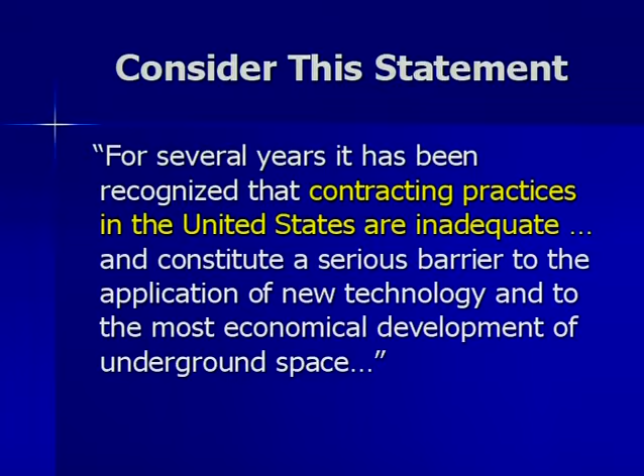But on the civil works side, tunnel contracting practices have gone through quite an evolution. Consider this statement, if you just bear with me while I read the key words. It says, for several years, it's recognized that the contracting practices in the United States are inadequate. Whatever we're doing now in terms of how we procure services, how agencies and states do it, it's not any good. So when was that?

I won't ask any of the students because it was way before most of you were born. It certainly was not today, wasn't last year, it was in 1974. So it's 30 years since that statement was made. It seems maybe benign in perspective of many controversial things going on today, but there was a crisis in the mid-70s.

Not just a fuel crisis, not just an oil crisis. To say that the contracting practices in the United States were inadequate was a comment that occurred because there were major construction projects. The Washington D.C. Metro had a lot of problems, delays, uncontrolled costs. I can even talk about the Central Artery. I think there were even bigger, more real problems at that time than people might allege about some of the big public works projects today.

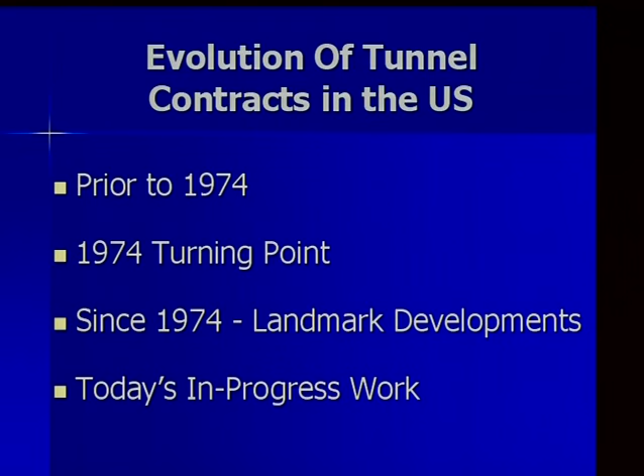Fundamentally, from the business side, whether you're a tunnel contractor or engineer, this was bad for business. If you had contracts, nobody could make any money, nobody was happy. Something had to change. So 30 years ago, there was a history of the way things were done from 1974 to a turning point. Then I'm going to talk about some developments that will come into things you do in geotechnical engineering, things you might work on in reports in the coming weeks, months, and years of your career. How what you do will fit in and have a role in future contracts.

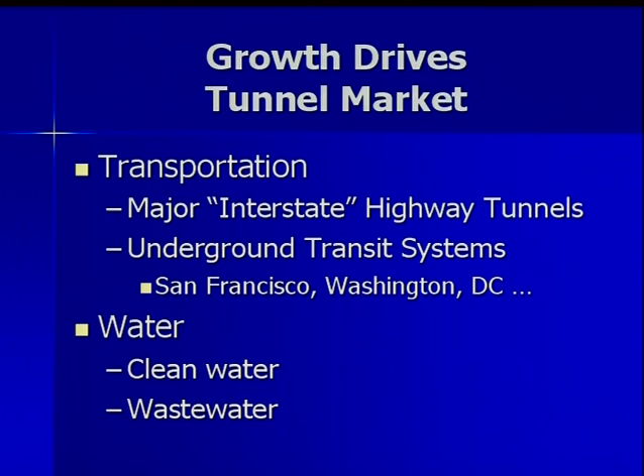Prior to 1974, and there's a reason for that date, what was driving the market? At that time, major interstate highways were still actively under construction. San Francisco was just finishing a transit system. Washington D.C. had started a decades-long process. There were clean water programs, wastewater tunnels. There was a lot of work going on. I show here the Washington Metro, and things in San Francisco, clean water. All over the world, there were these major projects.

But what was happening? The Eisenhower Tunnel - who has gone skiing in Colorado, driven out there? Have you driven through that tunnel up through the mountains? Anybody remember going over Loveland Pass? Scare you to death, you know? Well, those tunnels were hard fought. The first one, there's a whole story - that tunnel, the right one when you're going west, changed the paradigm of what it took to build these big projects. A lot happened because that job came to a dead halt, hitting a huge fault zone in the middle of the mountain. Water Tunnel number 3 in New York was also legendary and also a problem.

Clearly, there was something new needed, innovation, new ideas, better ways. We were really living in the 70s on the practices that had gone on - in my view, although I didn't know them personally - a lot of the World War II, post-World War kind of ways, the old-fashioned ways. It was therefore an opportunity for change.

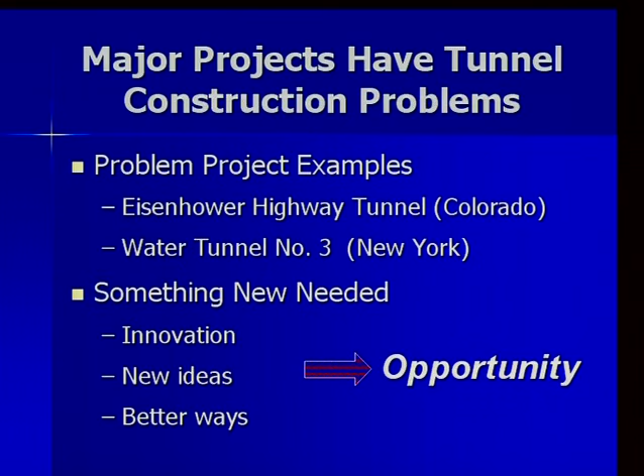Tunneling methods were changing - I'll just talk to them, I've given this talk to people who are tunneling. Different methods - the U.S. was frankly old-fashioned. Europeans were coming in with changes in tunneling methods, and eventually pressurized face tunnel boring machines, very special things that had to be sort of sent to them in the 60s and to Japan, and then came back in spades to us today.

Ground reinforcement - I'm thinking of a time when if someone said you would use a geotextile to reinforce a pavement or something like that, they'd think you were crazy. Those things were unheard of in the 1970s. Maybe not everywhere, but there have been so many changes of things we put in the ground that we used to throw away that are now permanent. Well, certainly things needed to change.

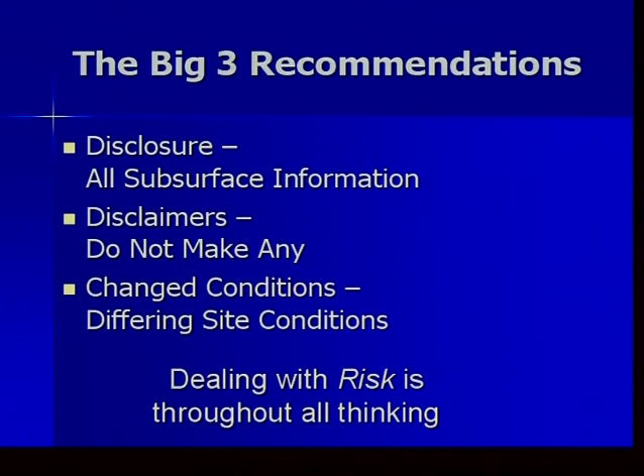They used to not be. There were things that were bad, and when they went from, let's say, projects on highways and bridges, to these major huge heavy underground works where billions of dollars were spent over the years, the problems became huge. Something needed to change. But the theme now that gets me to risk, is that really all of these things, we're dealing with risk, trying to manage it.

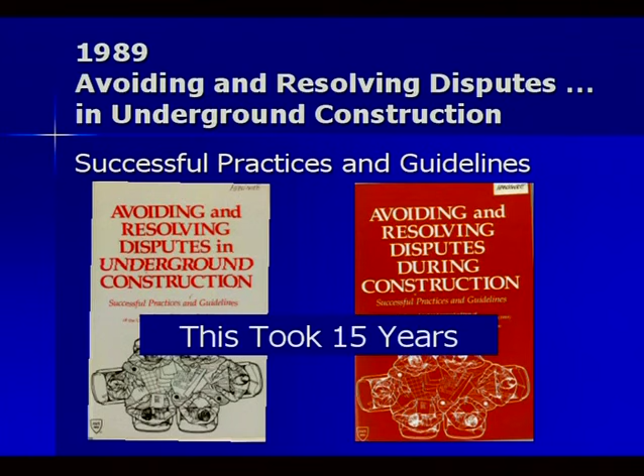In 1989, what came out - and I was a part of this, part of that first gray book - it said, hey, those things in 74 are pretty good. It got formalized with industry consensus. It came up with things like geotechnical data reports, a geotechnical design summary report, and some other things. Let me just talk about a geotechnical data report.

I keep looking at these Texas students down here. I guess I could find some UT students to pick on in a minute. They're back there that I know.

Maybe none of you have been in practice, but often you write a report, you go out and drill holes. Have any of you ever done that? Write a report, borings, lab tests. Somebody please say yes. Yes. And you get a lot of data. In a classic way of working in consulting, the facts were here, and then here's my recommendation.

And on something that goes on a long way, those recommendations will conflict as a project evolves, especially if it goes over many years. There was great confusion. So something evolved where you had a data report, a GDR. It separates facts from interpretation. It's intended to be contractual.

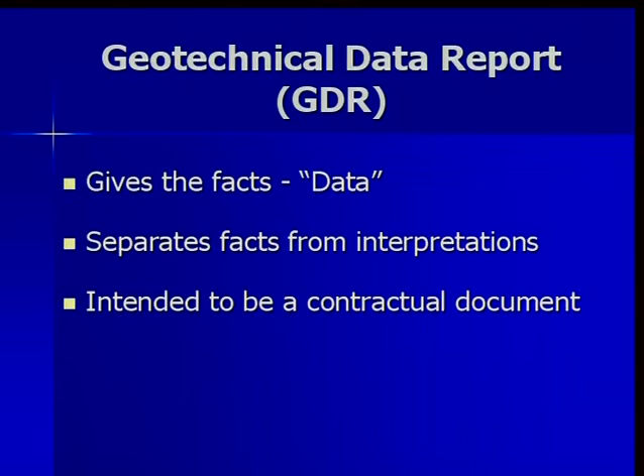Something else called a design summary report, and for these very specific things dealing with risk and tunneling, it placed that prior work in perspective. It would say, we thought about this, but then we decided not to do that. It would clear the air on what the old work would do. It also brought in the construction methods to design. It said, it's not like here's theory, now you contractor go out and build it. It's really trying to relate the practical stuff, that the design was constructible.

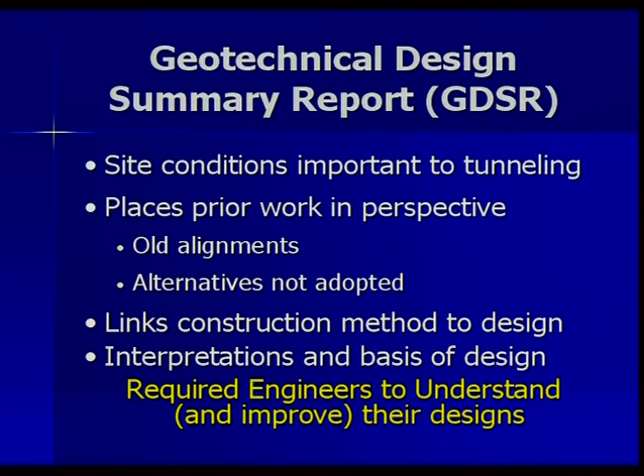It presents the interpretations, and more importantly, it was starting to require the engineers to understand and improve designs. Because when they had to write down, why'd you do that, most of them had a hard time.

Well, these are the recommendations and guidelines over the years, but there's a few problems with this design summary report. One of them was the tunnel contractor, or foundation contractor - that entity had a wide range of thoughts about what they thought the geologic conditions were. And those old reports, the styles, they really didn't have any teeth. They were kind of just nice information. Limited construction contract status, helpful but did not really solve the real problems on risk.

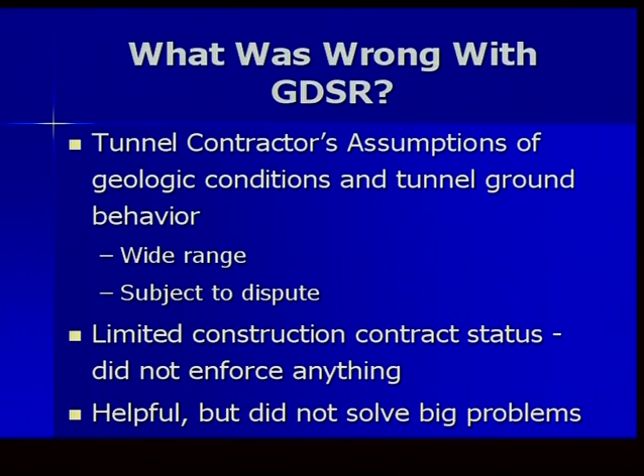Gets us to 97, geotechnical baseline reports. And who's ever seen this little yellow book? Is there anybody other than Fulvio? Yeah, gosh.

This is not arcane. It's published by the American Society of Civil Engineers, and it's a decade old. Since this is quite a geotechnical audience, I do think the baseline concepts for foundation contracts could be there. I haven't talked to Clyde about this, but I think those things could help manage risk on difficult jobs.

What does a geotechnical baseline do? It helped define and make people really understand the geology and the tunneling method, that they were linked. It wasn't just providing information. It was really a major advance in contracting practices.

It's generally accepted for tunnel contracts because it establishes things clearly. I'll give you an example. There's a certain art to it, and it has to be relevant. I want to get to an example of what a geotechnical baseline is.

Tell me, if the permeability of this ground ranges from 10 to the minus 2 to 10 to the minus 5 centimeters per second -- and if you think in millimeters or meters, please convert, or inches -- would that be something you could tell a contractor to base a bid on for digging a hole in the ground? That's three orders of magnitude.

Probably not. How about: boulders will sometimes be in the tunnel horizon? Sometimes -- that's a weasel word, a geotechnical word. But how about: crystalline bedrock will not be present? Yes -- I've got a tunnel in dirt and soil, and I'm not expecting to hit that. That would be a baseline, and a contractor wouldn't have to put money in for it.

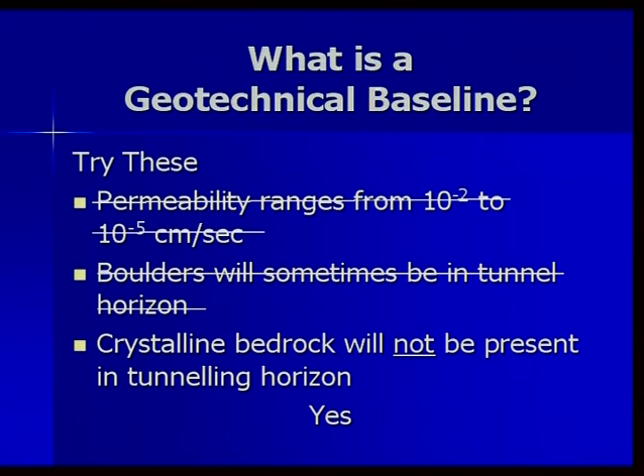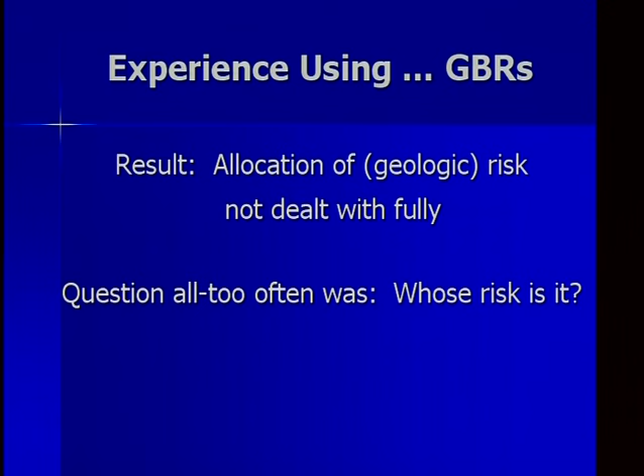I think this principle is very applicable to anything underground, not just tunnels. Well, the baselines have had problems. People started using them, but they didn't have enough contractual importance, and the reports are too darn long. They're starting to become works of art in themselves, and they weren't dealing with the fundamental problem of risk and whose risk it is.

So that gets us to my little summary about risk management. Over the decades, we'd see if there's a hazard -- in the old reports, we did this, but we didn't really quantify what the risk was. The design is supposed to mitigate and eliminate things, but it's not a very structured process.

And then we like to allocate the risk: Mr. Contractor, you do this, I do that. Usually owners want to give all the risk to the contractor, and it was being imperfectly done. These geotechnical baselines should really be about risk allocation.

But globally, I think you'll hear risk talked about everywhere. There's a groundswell of activity -- reports from the International Tunneling Insurance Group, the International Tunneling Association, the UK Code of Practice. They're all dealing with the same things.

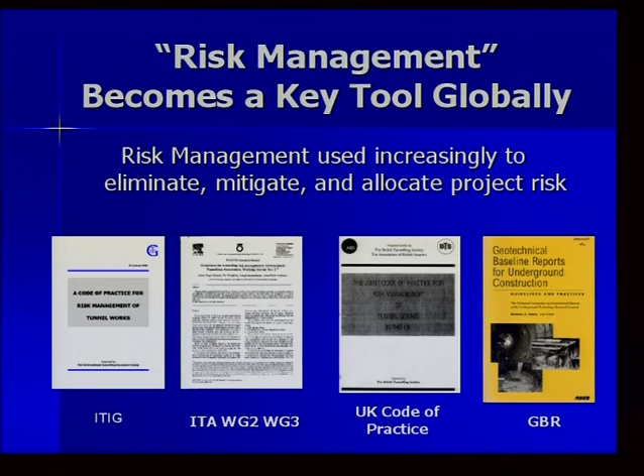There are two major things going on, and the third is what I'm talking about today. There is an update of the '74 guidelines, which should be out in 2007. The leader on this is Bill Edgerton, president of Jacobs Associates.

Jim Monsees is also on that committee, working on those recommendations and really looking at where we are to try to get industry consensus on several contracting provisions. I can give you details -- several of them are in the paper.

The other effort is an updated geotechnical baseline. Randy Essex, now with Hatch Mott MacDonald after a long time with Woodward Clyde, has been pushing that -- updating what would be the yellow book.

Where has project management fit into all this -- all the good and bad things that have happened? I think this is a little harsh, but not always the way: a designer designs, a contractor constructs, and you don't mix the two. That's not a good way to work. Once again, I give credit to Clyde for talking with the students about how you really need somebody out there.

You need to keep in touch, because on any difficult job you have to have people out there to see whether the design is really like what you expected. So the management of design, which is what I do, still has problem projects. We have these terrific risk management tools like the baseline and the data report, but often these things are just not in time -- they're not complete, not coordinated. That's a big thing, different people, and sometimes not enough.

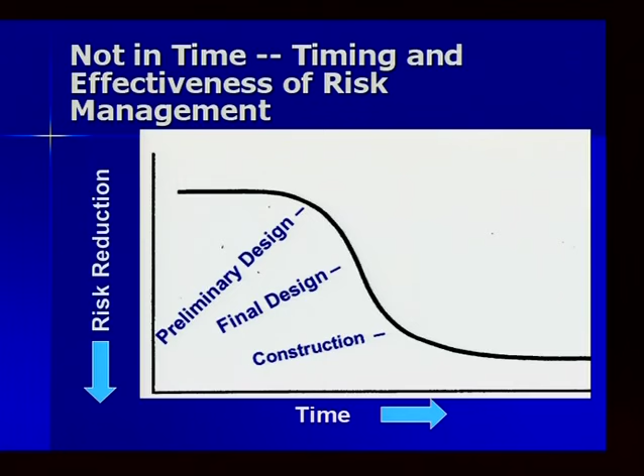So the risk management process, I won't go through the rigorous part, but you really have to identify things as hazards, and it's like this: you identify, quantify what it is, then you want to get rid of it, mitigate it, and allocate it. I'm going to give an example here in a minute about what a hazard is. A hazard is an event having a consequence, and a risk is like it's going to happen often or not so often. So a hazard is something bad.

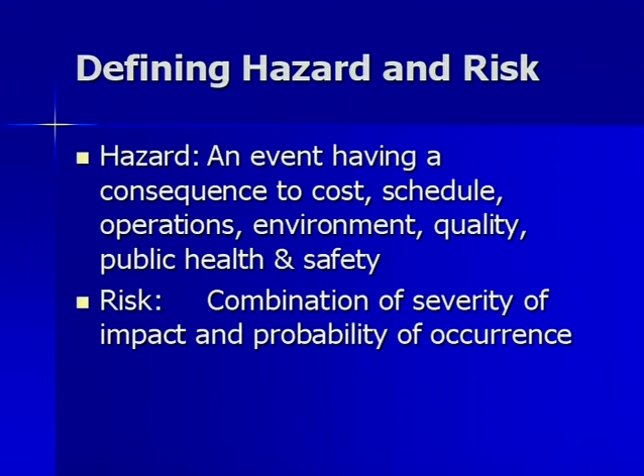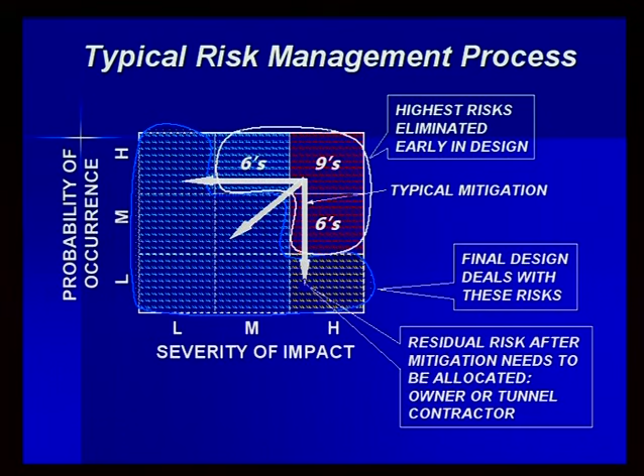I'm going to give this example and quantify it like this. It's a chart like this, 3 by 3. This is a risk that has medium probability but high severity. Then the whole process is, if you're into charts and so forth, which can be useful but need to work to not have that become your life, things that are rated the highest risk you've got to get rid of early. There'll be eventually some risk to a project that you have to deal with during design, and whatever's left over, residual, gets allocated somewhere. Somebody, the owner says, I'll take that risk, or the contractor takes it.

So now, here's an example. Texas A&M football team not winning the Big 12 championship. Is that a hazard? I don't want to see you guys down here, but. So I want to quantify that, and I'll tell you why I'm bringing this up. So the impact of A&M not winning, is that a high impact? It'd be turned around if I gave this talk in Austin. But what's the probability of A&M winning?

Now, there's a different version, there's probably a version of that in September, and September to November. So on the chart, it looks like this: in September, impact of not winning is bad, but it's low, new season. By November, oh yeah, I think where you're at. Now, if you guys didn't hear, I wasn't here two Saturdays ago because I am a Cornhusker graduate of the University of Nebraska, and I think they played football down here last Saturday. I thought maybe I'd tell you that only on the way out the door. I don't think you're in contention, but you obviously have a huge stadium and a great football program.

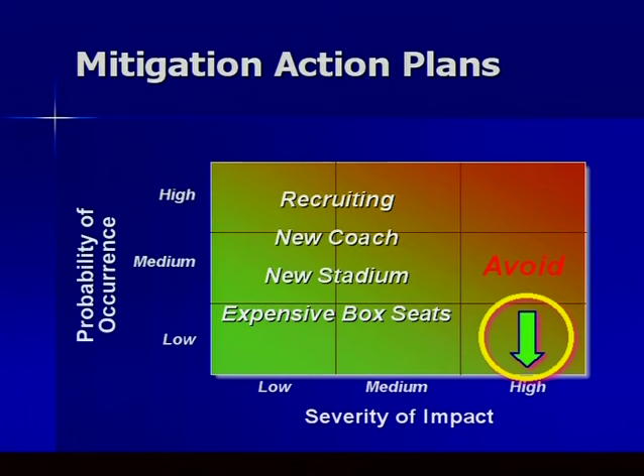The mitigation actions, to continue the example, what would you do if you're having a losing season? You'd want to avoid that, you'd want to take action. Typically the things you should do: recruiting, get a new coach, fire the coach, build a new stadium, or expensive box seats. Those are the usual answers. I haven't heard that you're going to get a new coach, I don't think. But that's the usual thing, you kind of find somebody to blame and move on.

Well, the big picture: for each hazard, whether it's football or otherwise, you can apply this. You need to identify it, figure out how bad it is to you. It's very local to your project, and then allocate everything for every risk.

Now I'm going to give you an example of a project I'm currently working on. I had a great progression: I went to Hawaii, Las Vegas, San Francisco, and it's that plot of something desirable, and then Detroit. I guess I didn't do too well there, but I'm actually quite pleased. I feel I have a good business reason to be in Detroit.

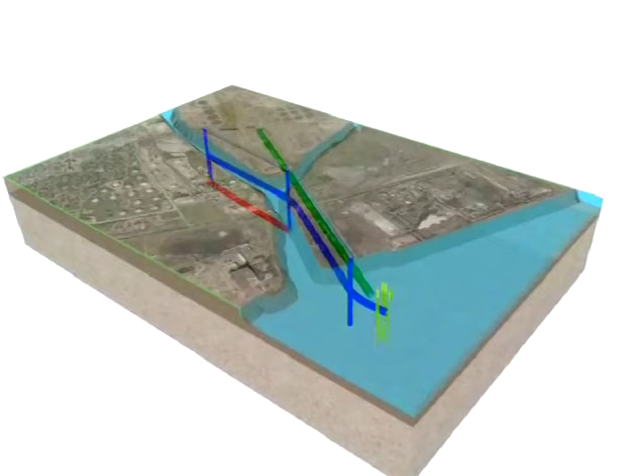This is a tunnel, an animation which I didn't make, of a tunnel. We'll maybe play it a second time. That's being built as an outfall tunnel going out to the Detroit River. A tunnel's been built, that's the red one. I'll show it one more time. That one failed, it flooded three years ago.

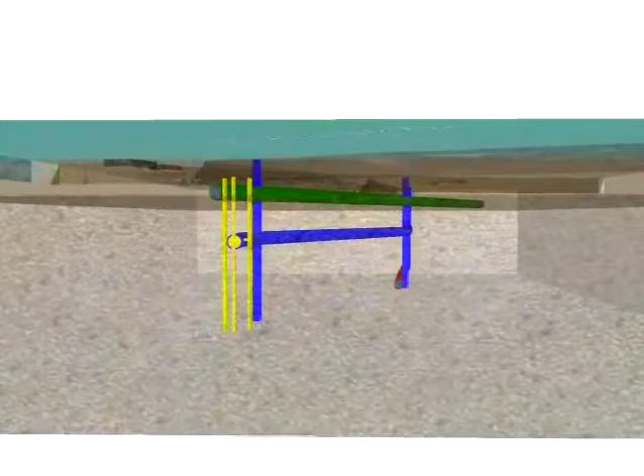The new one is blue, and we have to design and construct a new one. It's about 300 feet below the ground surface. There's also an existing tunnel. I can show this, maybe not going to show it again, but I'll show other pictures of it. It's a fairly risky project.

I didn't move there explicitly to do this job, but again, it's a project that has an existing tunnel. They sunk 100 meters down a shaft to get an outfall tunnel. This is the Detroit River. Canada's this way. Typical oil field kind of operation of huge diffuser pipes out in the river, a costly venture, a lot of money. Flooded the tunnel, it's a new design.

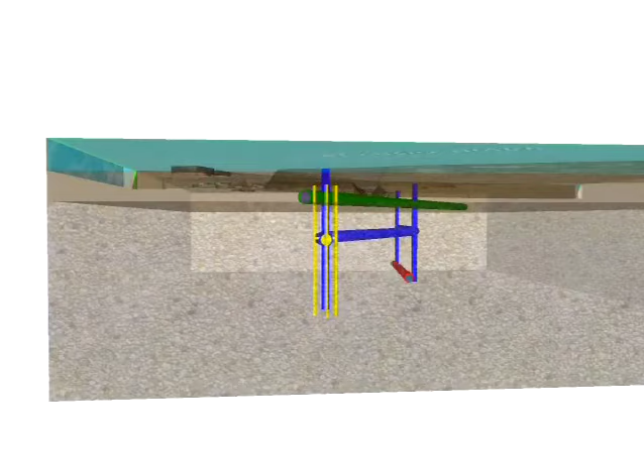I started on the design of that about 3 weeks ago. So I'm just going to give you a few of the things of what we're doing on this project to illustrate project management and risk management.

This is the project I just showed you. This is just some terrible areas of the world. This is the Detroit River, Canada's that way. One of the world's largest wastewater treatment plants over here, nearly 2 billion gallons a day come out this thing, and they need a second pipe to get it out here once it's treated. And they can't meet a lot of environmental permits.

If anybody knows the movie RoboCop, that movie is filmed out here in some old steelworks.

Well, here's the project. It's 300 feet deep. It's got soil and rock, Detroit River. This is the flooded tunnel. A very good tunnel contractor. Things didn't go right, I know a lot I won't even say. But there are 6 10-foot diameter, inch-and-a-quarter thick steel pipes out there to bring this waste, the treated effluent, out.

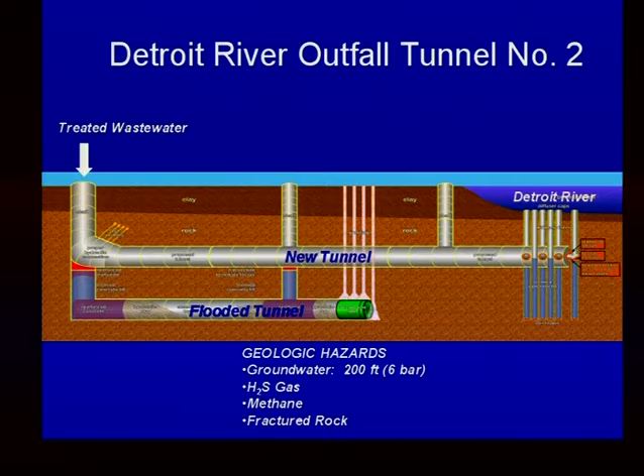In the river, just sitting out there, waiting to be used. We have to build the new tunnel. It has a lot of hazards, 200 feet. Even when it's raised up, that's 6 bar, or about 600 kilopascals. High water pressure, hydrogen sulfide gas, and methane. We have to deal with just the tunneling itself, the hydraulics.

There's very little head. And I'm going to click through this, if I make it here. Just the sequence, if everybody understands, you're looking at a profile, existing shaft that's 300 feet down, about 30 feet in diameter, and it's in soil over sedimentary rocks, limestone, and some other things.

The tunnel's been abandoned. It's full of water. In fact, it's even got artesian water. We were out there the other day. It's got a collar around it. It's got 10 feet of water extra, coming from the rocks up somewhere up toward Ypsilanti or somewhere, a place like that.

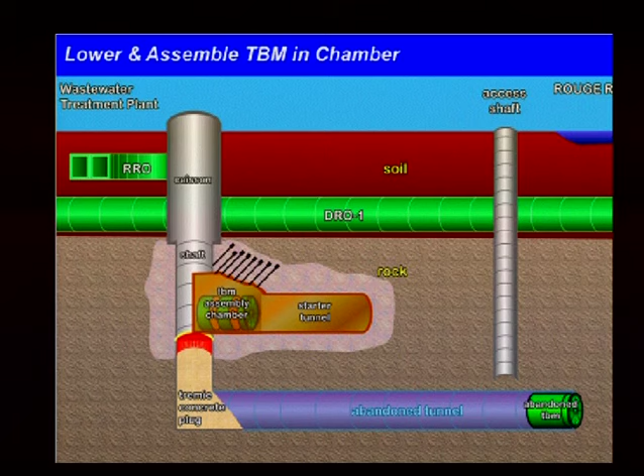We're going to grout around the machine, concrete up the old tunnel, put a plug in the shaft, concrete the whole thing up, do a bunch of grouting, create a shaft, build a machine, one of these big machines, a tunnel boring machine like I talked, and a starter tunnel, build lining, get that, it'll be a closed face machine, and then proceed tunneling successively out until we get out to the outfalls.

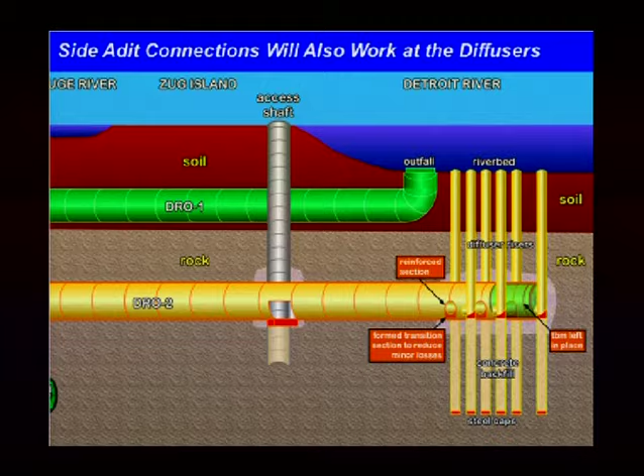We have to connect to these existing access shafts. And so out in these 6 pipes where the effluent comes back up, you have to hook them. This is what they look like, and the way the arrangement is, the one's right in the way there, so we have to take everything apart out there at your 200 feet below the Detroit River and the shipping.

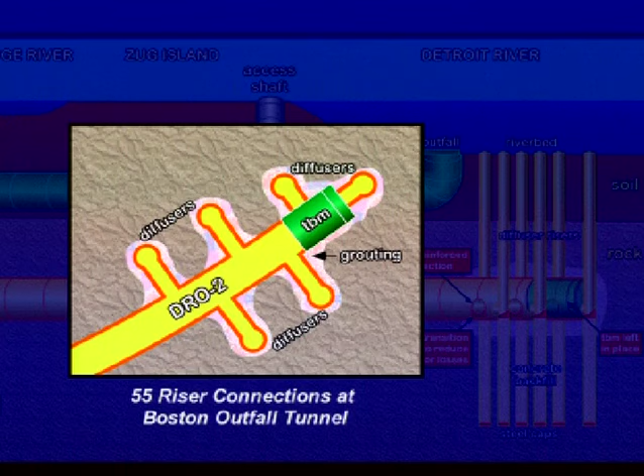This is what it looks like underground, will look like. There's a tunnel that under pretty tough conditions, you got to go out and dig a big hole, like that big, 80 square feet, or something maybe as much as 100 square feet, to get the effluent out into this pipe safely with a bunch of temporary things to eventually get yourself a connection that is smooth and hydraulically efficient to diffuse this effluent out in the river.

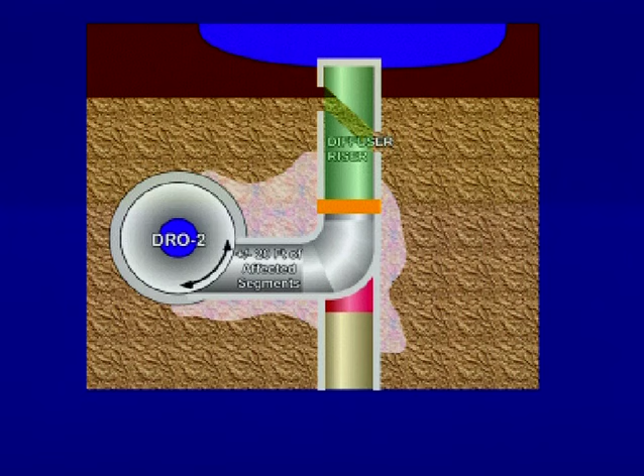And the river's moving right along. It's not like dead water. It's moving at 5 feet per second. It's a connector, it's really a strait between two Great Lakes. It's not a true river. And then complete the connection.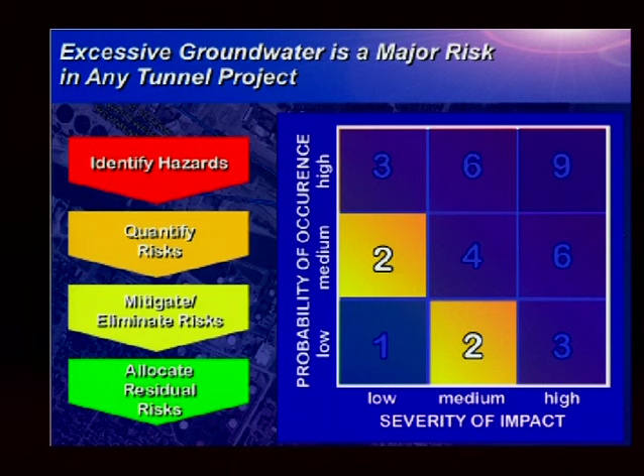Probably the most difficult thing will be to work with the city of Detroit on a contract that might be fair to do this work. So this is called DRO2. Risk management in this project links these things because there's so many things. You can't just do this design, that design. There's a lot of things that have to fit together.

We're dealing with tunneling and hydraulics, and this is the process. As I show, month 1 was actually October 31, the long delayed project. We will have a series of risk management workshops. We'll go through those things, identify them, quantify them. We'll get the state regulators to sign off on them, and then we'll mitigate and work on the fundamentals of getting these things allocated.

To complete the final design and get this thing out with a contractor going on this job in 2008. I've talked tunneling, tunnel contracting practices, and what I've seen in the last 30-some years. And then my own particular spin of where we're going in our company and what I do - risk management and project management - the two need to be together.

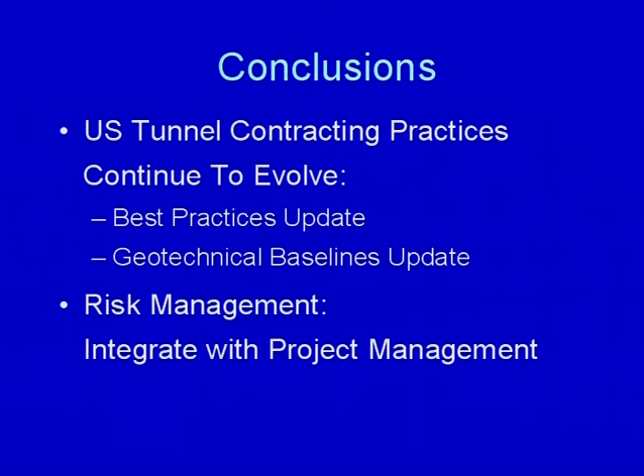The major conclusions are that contracting practices are not static today. Best practices are being updated, and I think the trend is to integrate so-called risk management in a very practical way, not a theoretical way, to actually manage and get projects constructed. Questions? Thank you very much.

We seem to be doing relatively well in calculating the risk and evaluating the risk, but on the other side there's a target risk. Do you have a difficult time in establishing what is an acceptable risk?

I want to comment on two parts of that. One is knowing and quantifying the risk, and then it's actually doing something about it. We're often good at - we don't do anything. We say it's too hard or can't be done. The other part is quantifying. What I didn't talk about was the calibration of things.

We found that on many things, you have to calibrate the sensitivity to that client. I didn't show the details, like if it was some issue in construction on this project, but another one for this client, which is the Detroit Water and Sewerage Department - if something costs less than $500,000 on construction, that was not a problem. It was a $500 million job. Now, other jobs, $500,000, oh, that'd be a big deal. It might be $50,000. There was a cost issue.

There's also a lot of public relations issues. It came down to how many phone calls to the mayor. One call you might be okay. The second call, you're dead. That was high impact. So I don't know that I completely answered your question, but there is a big activity to characterize what people really perceive, their reality of what's an impact, what's a loss, what's a risk. And that's where you've got to work with your owner - that's why the owner has to be there with you.

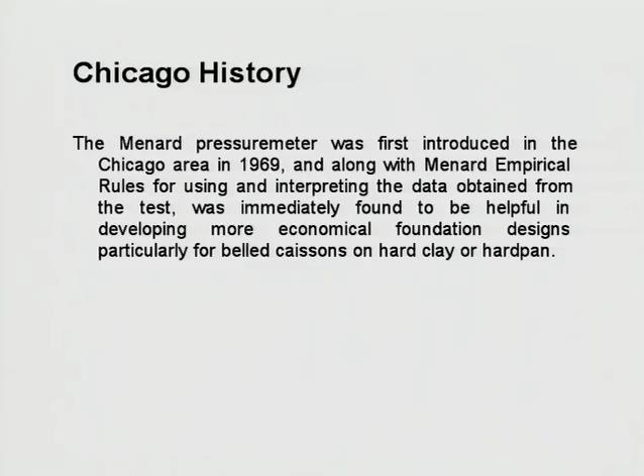The Chicago history. Our company was, I believe, one of the first companies to use the Menard pressure meter as an in-situ testing tool. It was developed by Louis Menard when he was at the University of Illinois, and we started using it in the Chicago area in 1969. We found that following the Menard empirical rules for using and interpreting the data obtained from the test, we were able to do a good job of predicting what was going to happen when a building actually loaded the ground. And we had case histories to confirm this. So we developed our confidence in the use of the pressure meter in our geology.

I just want to show you a typical soil profile in Chicago with the different foundation elements.

We usually have fill or sand at the surface, which can vary from a few feet to maybe 20 feet. Then we usually have a stiff clay crust, fairly thin, followed by fairly extensive soft to medium clay, underlain by gradually stiffer clays, down to a hard pan, a very dense mixture of clay, silt, sand, and gravel, sometimes overlain by a water-bearing silt and sand layer. That hard pan can sometimes have a plastic clay layer at the bottom, underlain by saturated silt, sand, gravel, and boulders, fractured rock, and then sound dolomite.

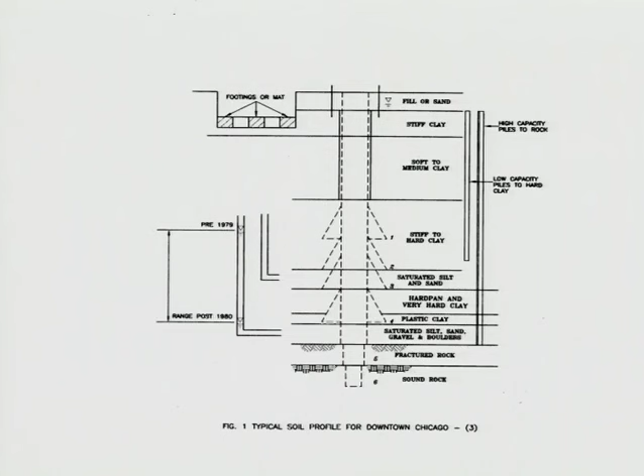You can see listed here the different foundation types: footings and mats up in the stiff clay. In early Chicago history, the tall buildings up to 20 stories or so were supported up here, and over time they settled excessive amounts. I think the Auditorium Building settled differentially about 18 inches, and maximum settlements are well over 2 feet.

Then there are different caisson, bell caisson levels, and different possibilities here, and of course low capacity piles that stop above the hard pan, and high capacity piles that go down to rock. This is a little history of the allowable bearing pressures on Chicago hard pan.

Pre-World War II, the allowable bearing pressure was 6 tons per square foot. By 1955, soil mechanics had developed a little bit, and they bravely increased the bearing pressure from 6 to 7.5 tons per square foot using a formula of 1.2 times the unconfined strength. That was increased later to 1.5 times the unconfined strength.

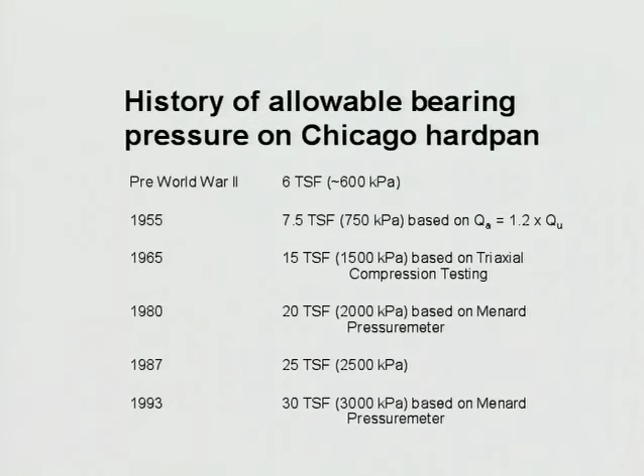About 1965, the highest bearing pressure had been up to about 15 tons per square foot, using triaxial compression testing to take advantage of some of the confining effects for the Chicago hard pan. Then in 1969 they started using the pressure meter, and by 1980 bearing pressures were up to 20 tons per square foot. By 1987 up to 25 tons per square foot. The highest bearing pressure used on hard pan in Chicago was on a local basis of 30 tons per square foot. However, the city of Chicago has capped us at 25 tons per square foot, no matter what our testing shows.

We took small steps, as you can see, in the determination of pre-consolidation pressure. We found that's very important. Early research by Lukas and de Bussy indicated the pressure meter creep pressure was a good indicator of the pre-consolidation pressure. The nice thing is that the pressure meter test is a much quicker test. If you try to determine the pre-consolidation pressure with consolidation testing, you've got to have good undisturbed samples and the time to run the test.

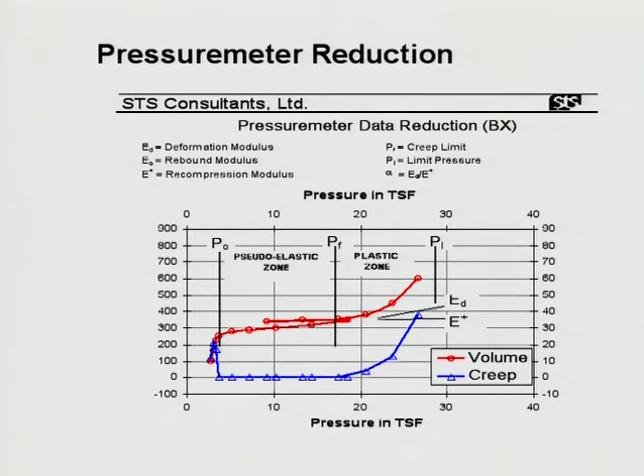The rules that we follow with the pressure meter are local rules that make sense to us and have worked over the years. That is, the dead load pressure plus the long-term real live load pressure plus the effective overburden pressure must be less than the creep pressure. The reason for this is so we can rely on the settlement methods that we use, where you're assuming a pseudoelastic relationship.

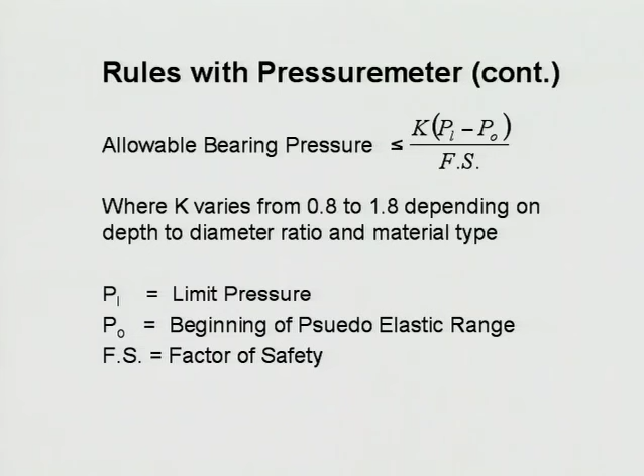For allowable bearing pressure, in the early days with the pressure meter in our overconsolidated soils and with the granularity of some of them, the way we calculated bearing pressure using the Menard rules, bearing capacity was never a question, because the K value was fairly high. Over the years, investigators have found that K value is too high, and it has been lowered, now typically in the range of about 0.8 to 1.4. We have 1.8 here, but seldom use higher than 1.4, depending on the depth to diameter ratio and the material type. So with these lower K values, bearing capacity has to be checked even on our Chicago hard pan.

Settlement theory using the pressure meter data: the two most common procedures that we use are the semi-empirical Menard procedures.

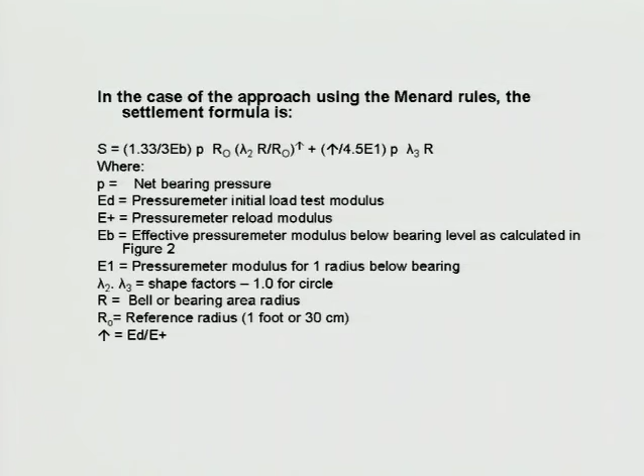For those of you who are familiar with the Menard procedures, this is the formula. I won't go through it now, but it's in the paper. It's also very extensively covered in Professor Briaud's book on the pressure meter, which I strongly recommend anybody interested in the pressure meter have in their library and use.

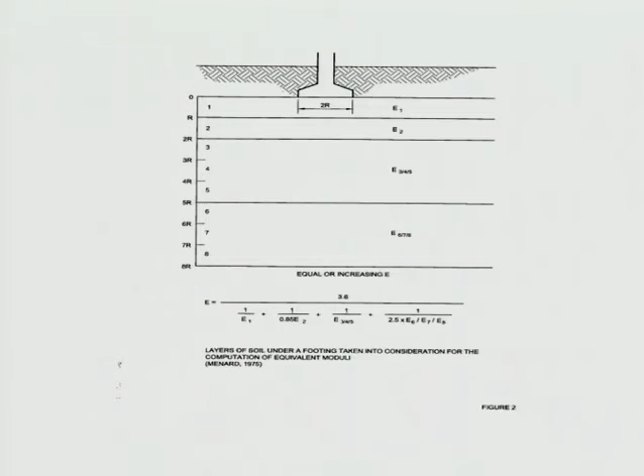I'll just go through quickly the old Menard rules that we still use, the layer system that he developed. As I understand it, in the early days he correlated it with his experience, and so it's semi-empirical.

And it works very well in our preconsolidated soils. The Menard alpha factors, we still use the Menard alpha factors, but we modify them slightly. We take as an alpha factor the initial modulus divided by the reload modulus, as a starting point, but we don't typically go below the values given by Menard, except that we do use an alpha factor of 0.4 on our hardpan, and we don't go below 0.3 on the granular soils.

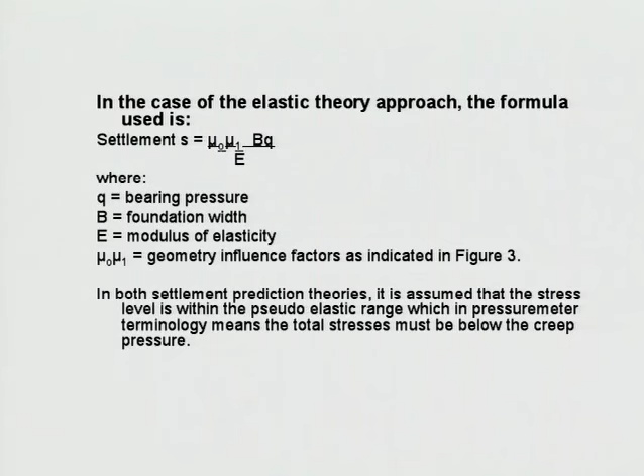The other procedure we use for predicting settlements is the elastic theory approach, where we use the pressure meter to give us a first crack at an elastic modulus, using the formula indicated here, which is from Christian and another author, a common formula for using elastic theory for settlement prediction. The mu factors, mu0 and mu1, are from the Christian Carrier paper, and we find it very helpful using these formulas for predicting settlement with the pressure meter modulus.

The only question is, what modulus do you use? In the case histories that follow, you'll see what we've done. We try to correlate with building performance.

Early in Chicago, about 1975, the tallest reinforced concrete building in the world was Water Tower Place. It's supported on belled caissons in the Chicago hardpan, and we used the pressure meter to predict the settlement of the building. The settlement prediction was 2 inches, which was rather significant, and the Chicago Building Department doesn't like to accept predicted settlements over an inch. Back in those days we were able to get it through. We actually have more trouble now getting anything over an inch through the Chicago Building Department.

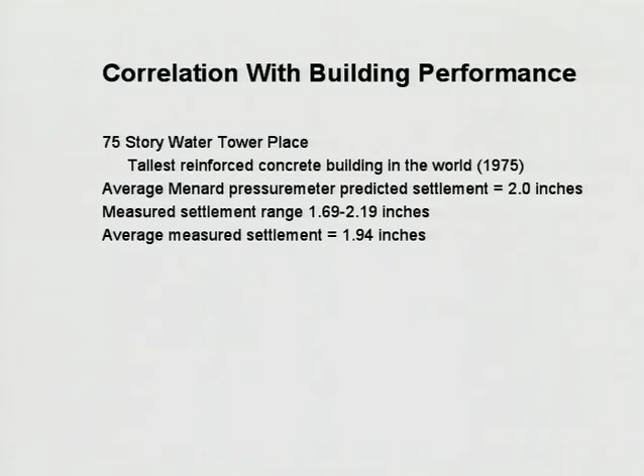The measured settlement after construction ranged from about 1.7 to 2.2 inches, with an average measured settlement of 1.94 inches. That's remarkably close to the predicted performance. With such a heavy structure, that gave us a lot of confidence in using the Menard rules we've been using in pre-consolidated soils for predicting settlement.

Once you develop confidence in being able to predict settlement under load, it opens up possibilities for what you can do sometimes in saving money on foundations. You'll see a number of case histories here to illustrate that.

However, to further confirm our confidence in the prediction methods we were using, we took the caisson load tests that we had. There were very few of them on the Chicago hardpan in those days, very expensive to run big load tests. But we took the few that were available, and took the soil information from that area.

If it was an old test like the Esposito test at Union Station, done about 1919, there was no pressure meter data available then, but we had boring data in the area with pressure meter tests, so we used that data to predict the settlements at the point we would use for the building load. Then we'd go back and correlate it with the caisson load test data at the half point, factor of safety of 2, and see how it compared. We got very good comparisons, good enough that we were able to substantiate our confidence in using the pressure meter for predicting settlement.

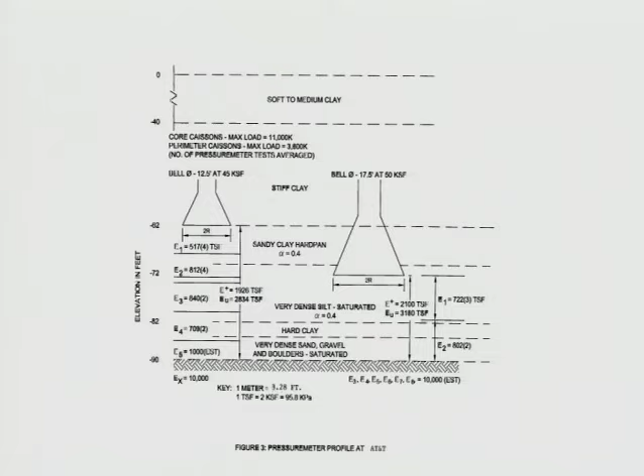This was successfully done, but the perimeter caissons could be supported up on the hardpan. So we had perimeter caissons on the hardpan, and core caissons down on this very dense silt. We had pressure meter tests in the hardpan and the very dense silt in order to see if the differential settlement was going to be acceptable.

I won't take the time to go through the calculations, they're in the paper also. I won't take the time to go through the calculations, but we used the Menard procedures for determining the effective modulus and then calculating the settlement.

I think this wasn't at the end of construction, I think it was about, with construction maybe 70 to 80% complete. Calculated settlement for the full load was 0.6 inches. At 80% load, the calculated predicted settlement is 0.48 inches. That was for a 12.5 foot bell, and for a 17-foot bell, 0.6 inches.

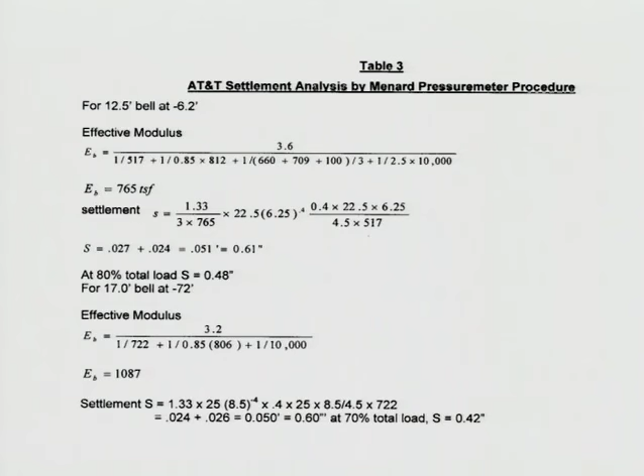Then by elastic theory, we did the calculation and settlement prediction using the elastic theory, using the modulus determined from the pressure meter. I should mention that for the elastic modulus, we typically use the reload modulus from the pressure meter test, and not for any theoretically justifiable reason, but because it seems to work, or we're trying to find some correlation that works in our geology.

What we found is that what actually works—we tried it both with the rebound modulus and with the reload modulus—is that the highest modulus we can get out of the pressure meter test is the one that seems to work best for us in predicting what's going to happen settlement-wise.

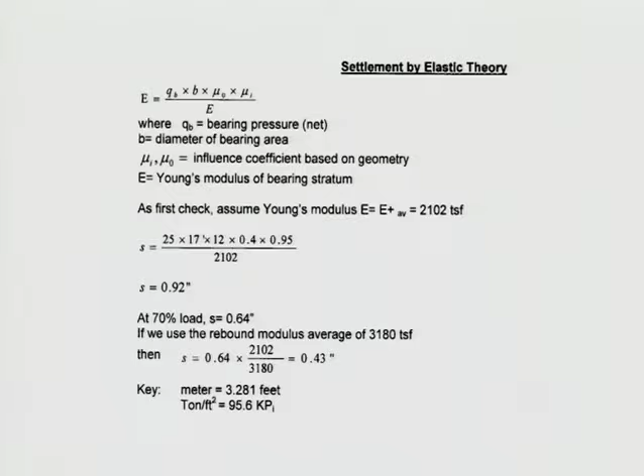For instance, here, when we use the rebound modulus, it's quite a bit higher than the reload modulus, and then the predicted settlement is 0.43 inches. This is at 70% load. The actual settlement was pretty close to the predicted settlement.

The building was monitored, and the reason we're doing the calculations at 70 to 80% load here is that's when the settlement data was available, and the actual measured settlements were right in line with the calculated settlements. So that gave us quite a bit of confidence.

Now to another very interesting case history. This is a south side office building with a particular soil profile. On the south side of Chicago, we have sand over a thick deposit of soft clay, and the clay is typically even softer than it is in the downtown area, underlain by stiff clay, but the hardpan was missing.

So the original geotechnical engineer had recommended supporting this 12-story building on, again, either rock caissons or driven piles. The developer said it's going to cost too much, and asked isn't there some other way that we can reduce the costs? Isn't there some way that we can build over this profile without going to rock?

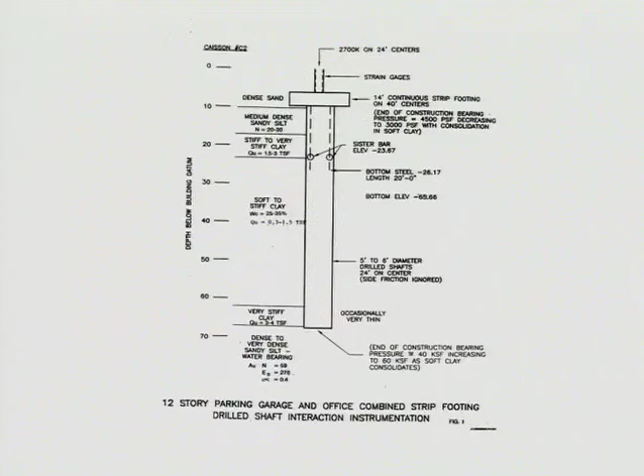You have a strip footing here, or it could be a mat, sitting on the dense sand, or medium dense sand, over a thin stiff clay crust, then the soft clay, then another thin stiff clay, and dense to very dense water-bearing silt down here. If you just use the strip footing and this sand layer as a mat, that's the reason you can get by with a strip footing rather than a mat here.

The predicted settlements, because of the consolidation of the soft clay, is on the order of 8 inches. And this, of course, was totally unacceptable. So the logical thing would have been to put it on deep foundations, which is what the original geotechnical engineer did.

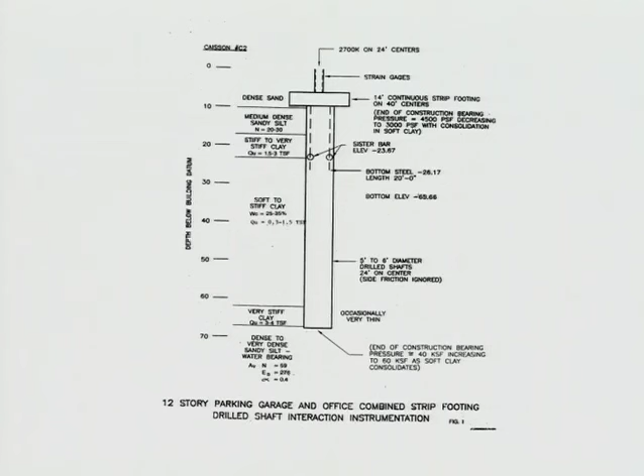But looking at it using this straight shaft, which is fairly cheap, you just drill a straight shaft down to this very dense water-bearing silt. It's open, and you put the concrete in before you have a problem with the water-bearing silt. It's dense, but if you took the time to bell down here so you didn't need this mat concept, you'd have a blow-in. So you couldn't do that, but you could do this open shaft.

We did some calculations that indicated initially, when you put the load on and built the building, a lot of the load, more like 60% or more, would go into the mat, and 40% into the shaft. But then as consolidation occurred, more of the load would go into the shaft, and you'd eventually end up reversing, having at least 60% of the load carried in the shaft and only 40% or less carried up here in the strip footing.

We wanted to instrument it to see if it actually would work this way. The city structural engineer designed it so that with a lot of margin, if we were off plus or minus 50%, he was covered in his design of the footings, and the city eventually bought it. But we wanted to instrument it to see how it actually behaved, how close we were. In these situations people don't like to spend a lot of money, so we didn't get as much instrumentation as we would like, but we did get some on a couple of columns and also in the shaft.

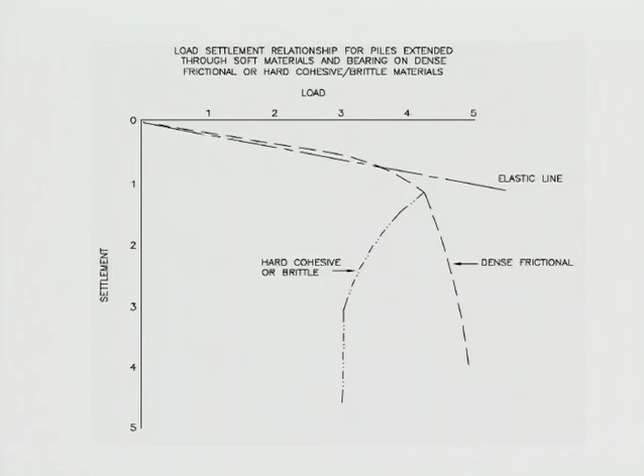However, if you've got a hard cohesive or brittle bearing deposit, it might not work so well. If you're wrong about where this occurs, you don't want to go past this, because then all of a sudden it doesn't carry the load it's supposed to, and you could have undesirable consequences. So in this case, again, it worked out quite well.

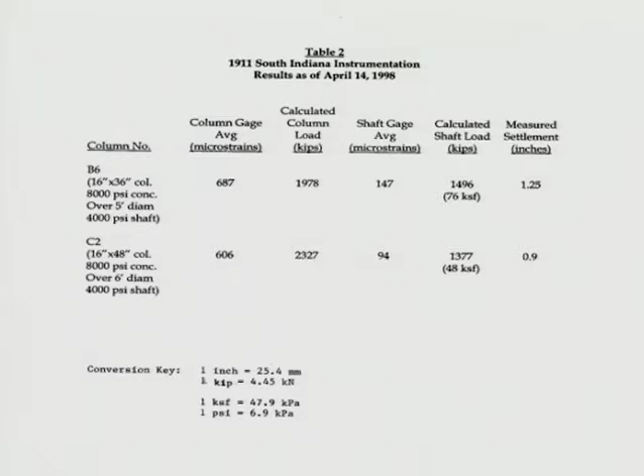However, at this point, this is actually 4 years after construction, so there isn't an awful lot of settlement. And in actual fact, we had predicted that using the pressure meter data.

We made one assumption, to be a little on the conservative side: we assumed that because that dense silt was saturated, there would be some loosening effect. Though it would tighten up when the concrete got in, it wouldn't tighten up to where it was before.

So we cut the pressure meter values in half, basically, and where we had originally predicted 2 inches of settlement, it looks like we only got about half what we predicted. So we probably would have been better off matching data if we hadn't made the reduction in the pressure meter data. But conceptually, I think this worked very well.

The client was very happy. And a conclusion from this job: innovative, cost-effective solutions to foundation design problems are sometimes possible using combinations or mixtures of foundation elements, provided that ground deformation and response to structure loading can be reasonably predicted within allowable tolerances.

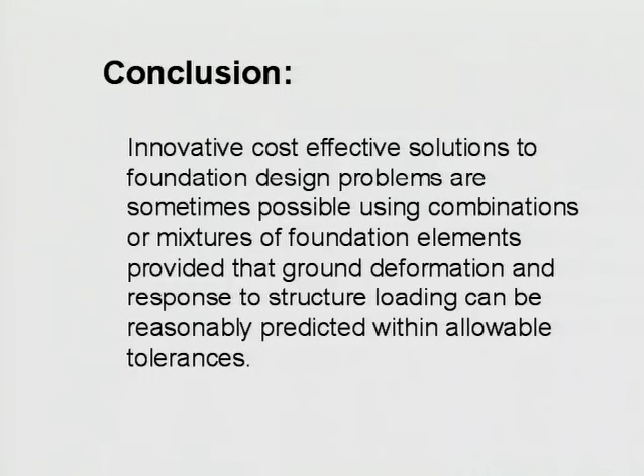This is another case history where we were able to do something innovative by using the pressure meter data to predict how the building was going to perform under load. This tells the concept, but before I talk about that, I should say more about this particular project.

There was a building there already on belled caissons. It was an 11-story building, an old building on hand-dug belled caissons, and there was a raft of them, and it was a deep 3-level basement.

They wanted to build a 35-story building, taking down the existing structure and building a 35-story new structure. With all those belled caissons in the way, it would have required moving around and putting the new structure on rock caissons. Again, rock caissons being very expensive, they were asking, well, what else can we do?

So the concept here is to use the deep basement excavation stress relief in combination with a new basement mat over the existing foundations, to maximize the number of additional floors possible at the site. We didn't know in advance how many floors we could get.

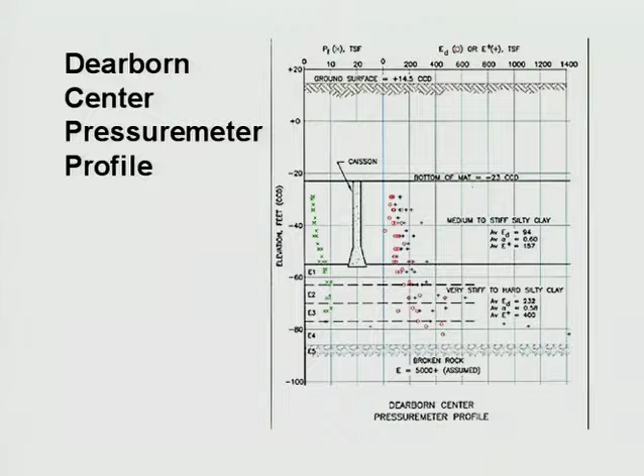Here's the existing caissons. Here's the bottom of the mat, medium to stiff clay, and the existing caissons are on a very stiff to hard silty clay. Not good hard pan, not our good Chicago hard pan, but I think the bearing pressure for the existing caissons calculated out to be something like 16 KSF, which is higher than the 12 KSF which was the code allowable in those days. But anyway, that's what it calculated out to, the 16 KSF.

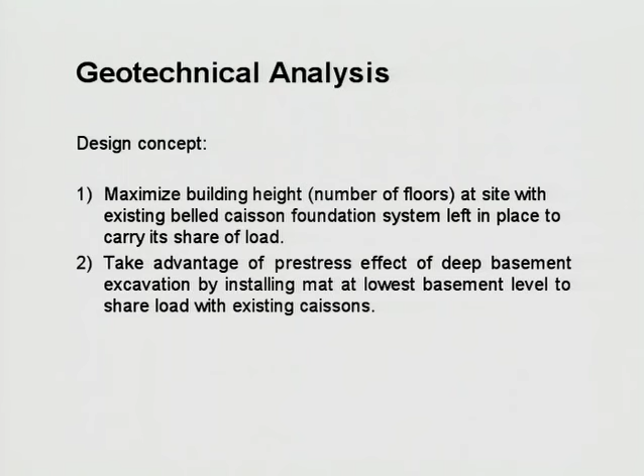So on the geotechnical analysis, well, I sort of explained this. Maximize building height, number of floors at site with existing belled caissons, foundation system left in place to carry its share of the load, take advantage of the pre-stress effect. Using the pressure meter data, calculate the maximum sustained load that can be carried by existing caissons without exceeding the creep pressure. Calculate the settlement under that load. Calculate the pressure that the mat can take for equivalent settlement. Combined loads at equal settlement represents maximum sustained building load that can be applied. That was the approach.

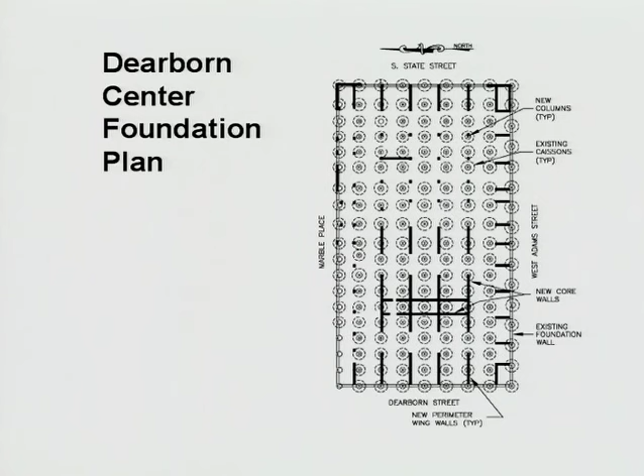And the structural engineer stiffened up the building. He was able to put in some shear walls in the basement to help stiffen up the building. He wanted to use a rather flexible mat, so the mat was only like 3.5 foot thick over the existing caissons, because he wanted to save as much space in the basement as he could. He did a three-dimensional SAP analysis to determine the overall behavior using the geotechnical developed springs. We gave him the springs to use based on our pressure meter analysis and calculations.

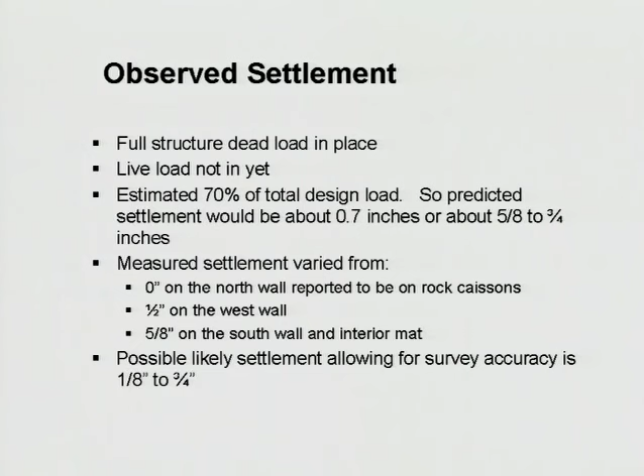And this is the structure. Nobody wanted to pay for settlement measurements. We tried to get the contractor to pay. We tried to get the owner to pay. But nobody wants settlement measurements up front. The actual settlement was a little less than the predicted settlement, but not bad. In other words, the predictions were not bad, and they were on the conservative side. So we were happy, the client was happy, everybody was happy.

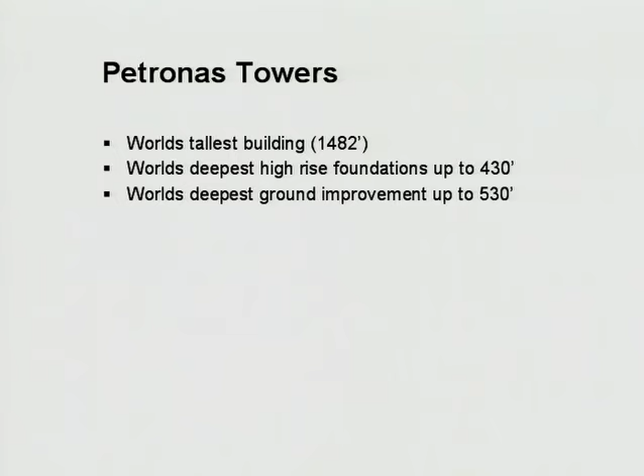Okay, moving on to the fourth, I think this is the fourth case history. There are five. The Petronas Towers. When we worked on these towers, they were going to be the world's tallest towers, and they were the world's tallest for a while, 1,482 feet tall. They're no longer the world's tallest. However, as far as I know, they have the world's deepest high-rise foundations. The foundations go up to 430 feet, and the world's deepest ground improvement, up to 530 feet.

And the concept is, well, first I should say, the owner wanted zero differential settlement. Well, the design team said that's impossible, we can't build this with zero differential settlement. So it was agreed after some discussion and analysis that we should set a goal of a half-inch differential settlement from one side of the mat to the other, and that the design solution was a mat on friction piles. And the way we would control the differential settlement was by varying the length of these friction piles. They vary from maybe 40 meters to 130 meters in length.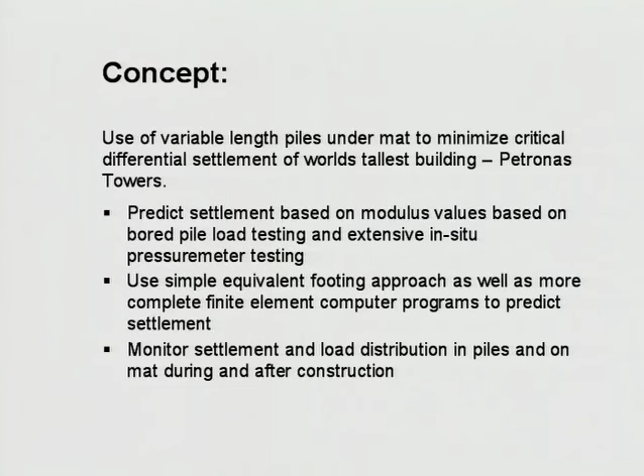In predicting the settlement, the predicted settlement would be based on modulus values, based on bored pile load testing. There were two load tests performed, and extensive in-situ pressuremeter testing. And then we thought we would use a simple equivalent footing approach to calculate or predict the settlement, and the structural engineer was going to use a more sophisticated finite element approach. And then we would monitor the settlement and see how it actually turned out.

Just to give you an idea of why this Kenny Hill Formation is very dense, the average blow count here is over 100 blows, so it's very dense soil.

It's probably better than our dense hardpan, very dense. You can see the very dense 100 blow material, or better, although there are occasional thin weathered soft seams, and also some very dense hard seams, 300 blow material. So the range from 30 to 300, with the average over 100, is a fair depiction.

The pressuremeter test results, I forget how many there were, a large number of pressuremeter tests. The average values for the initial load range from a low of around maybe a little under 40 MPa to a high of almost 150 MPa. Then on the unload or rebound modulus, the values were fairly close to the same, so it didn't make much difference which we used.

But the range of pressuremeter values was a low of maybe 176 MPa and a high of 535. The average rebound modulus was 267 MPa.

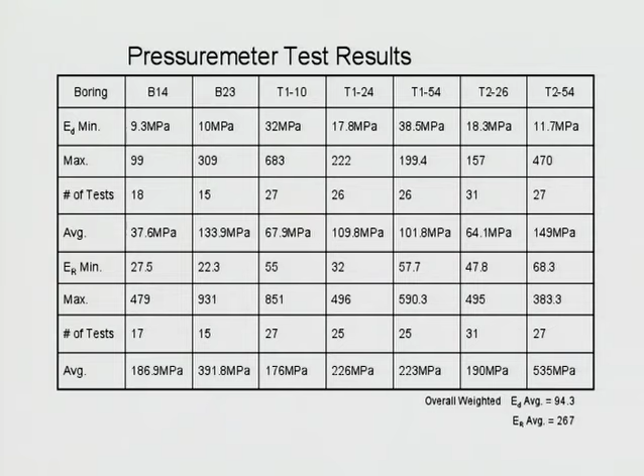The elastic modulus back-calculated from the caisson load tests was around 200, over 200. Allowing for the fact that the caisson load tests were performed in an area thought to be a little poorer than here, the value of 250 MPa was selected for the modulus to use in the design and calculations. And the simple equivalent footing method, we just took an initial.

This was before the variable pile lengths. I think we were working with 60-meter piles here, which is probably not the average between 40 and 130, but it was the starting point for what we were using. We used 60-meter piles for the equivalent footing, then at about 40 meters, and then calculated using a slope of 1 to 4.

Below the load spread from the friction around the block. In the equivalent footing method, of course, you assume a block analysis. You assume all of the piles and the soil in between act as a block, and that you can replace that block with a footing down at about two-thirds depth, assuming the friction spreads out on some slope.

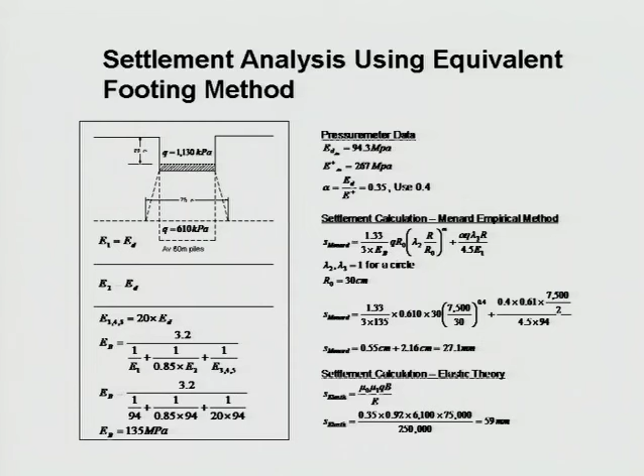I won't go through the time to go through the calculations, but they're in the paper, and they're fairly straightforward for the equivalent footing method, both using the Menard approach and also the elastic theory approach, which are the two methods we used for predicting settlement.

Just as an example, using the Menard approach, the predicted settlement was about 41 millimeters, including 27 millimeters of soil compression below the equivalent footing and 14 millimeters of elastic compression above it. By elastic theory, it turns out to be 59 millimeters below the equivalent footing plus 14 millimeters, getting you up to about 73 millimeters. So the elastic theory gives higher values than the Menard theory.

I think if you doubled, we actually used this data on another similar job, where we decided we would double the modulus, because here, if we doubled the modulus using this equivalent footing approach, we'd get a settlement that would just about match the Menard settlement. You'll see what happens and how it actually came out.

These were the predicted settlements using SAP, the computer model, which was an elastic model. Again, 73 millimeters maximum kind of matches our simple hand calculation with the equivalent footing approach.

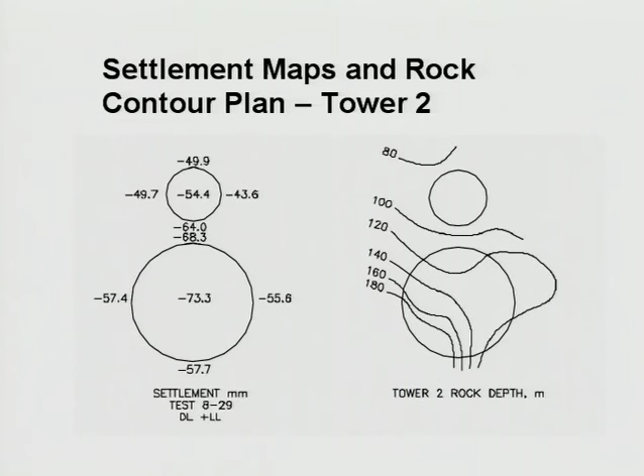Again, these are the two towers. They both are predicted to settle about the same. The differential settlement across the tower was kept, this is predicted now, to less than half an inch. The maximum goes from 68 to 57, about 11 millimeters, so slightly less than half an inch. So in theory, we achieved our half-inch goal.

So it's still less than even the amount of settlement that we predicted using the Menard approach, and it's only half, or less than half the settlement that predicted using the elastic approach with the elastic modulus taken as the rebound modulus on the pressure meter test.

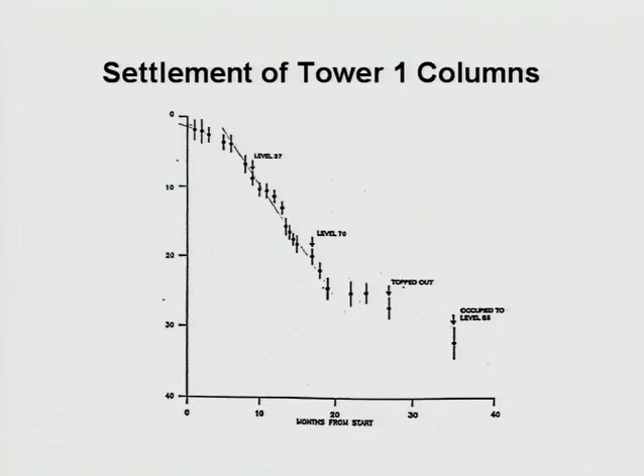If we took into account that pre-stressing effect in our settlement predictions, we'd knock off maybe 20% of the prediction. So instead of, we'd be a lot closer. If we knocked off 15 or so millimeters, we'd be much closer to the actual prediction. Or not 15 millimeters, but about a quarter of what we predicted. So with the Menard, where we predicted like 41 millimeters, if we knocked off a quarter, we'd be pretty right down in that 30 millimeter range. And the elastic theory approach would be closer too.

What did we learn? In-situ testing with empirical correlations works well enough for engineering purposes. The Menard empirical procedures yield better settlement predictions compared to elastic theory using test pressure meter modulus values as the Young's modulus for the soil and geologic conditions reported herein. This is just this job. Simple hand calculations for settlement and bearing capacity can be as reliable as sophisticated computer solutions. And innovative, cost-effective foundation solutions are often possible with close interaction of geotechnical and structural engineer and cooperation of experienced contractor.

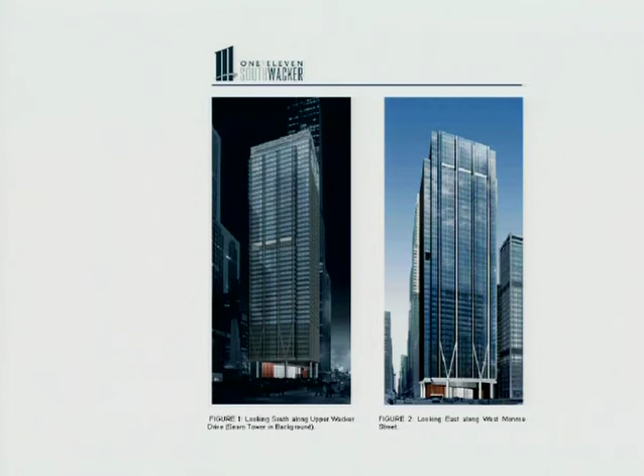And the final case history is another one of these interesting ones with a lot of existing foundations. This is, for those of you who ever come to Chicago, this is 111 South Wacker Drive. I think it's a 52-story office building, new one. And it's built where there was a 20-story office building that we did the geotech for. So they take down, to me it was nice looking, it was the old USG building. It was nice looking and everything, but that's progress. They took that down and wanted to build a taller one. Unfortunately, all the existing hard pan caissons were there in the way.

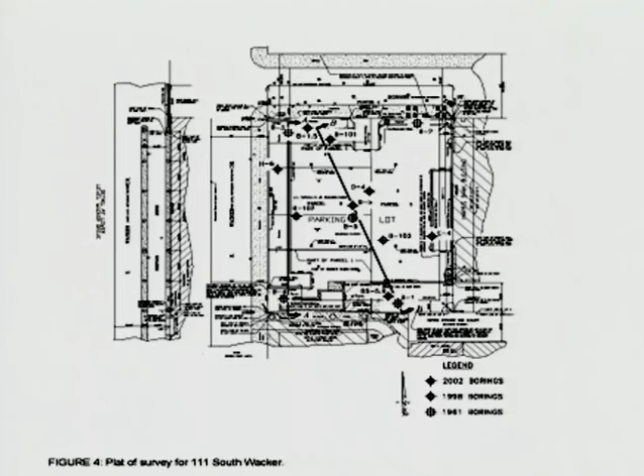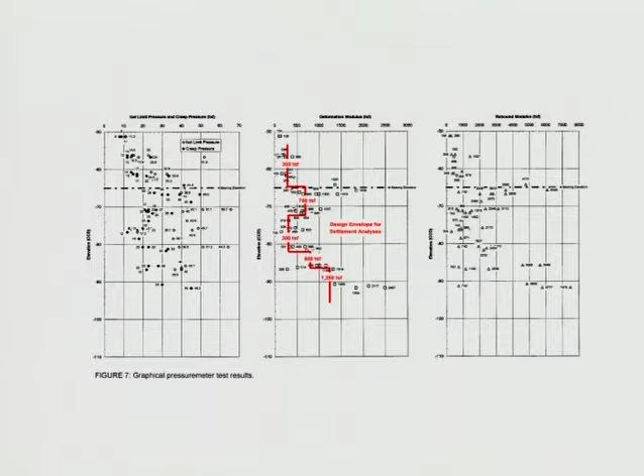Everything went smoothly. I think we predicted something on the order of an inch settlement. An inch seems to be a magic number.

But there was a lot more that had to be done before this project went forward. There was a lot of investigation of the existing caissons, coring of the existing caissons to prove that they were good, even though we had done all the inspection ourselves and we were confident in the quality of the caissons.

We had to do enough verification testing to satisfy everybody that the existing caissons were good. And one of the problems that occurred was on the perimeter of the job, where the new caissons got too close to some adjacent rock caissons off-site, and they had to blow in the bell while constructing the bell from those adjacent rock caissons. In other words, the next building to the south.

So one of those caissons, there were efforts made to save it, but in the end it couldn't be saved, and they had to put one caisson down to rock. The other caisson was almost good enough. If it could be supplemented with micropiles, we could get the capacity we wanted. So we put a collar of micropiles around the caisson to get the capacity that we needed, and then the project went forward and they built it.

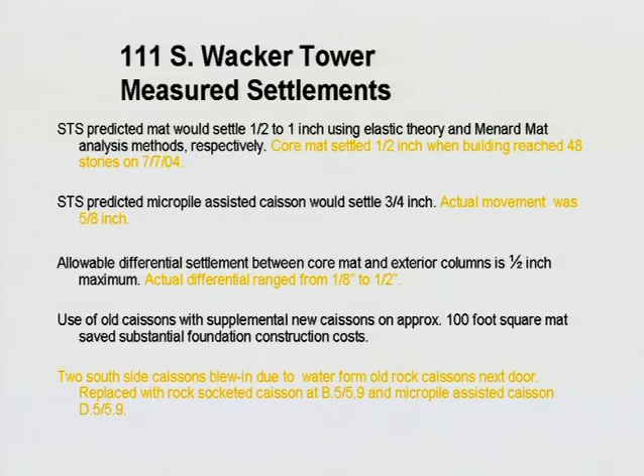I think we got a remarkably good correlation between prediction and performance, considering the fact that we had belled caissons at different levels on different materials, and we had the rock caisson, and we had an enhanced belled caisson with micropiles. So this summarizes more or less what I just said, and I think with that I'm open to questions, and I think I got a minute left.

In our experience, there have been cases where using our procedures, the way we use the Menard rules and everything, doesn't give a good correlation. One of those locations is where you've got a lot of layered soils, and for one thing it's difficult to get representative data anyway in layered soils. You have membranes blowing if you have a hard layer and a soft layer and so forth, so it's very difficult. But even if you could get it, sometimes those hard layers mask transfer load in such a way that it's almost as if the soft layers weren't there. In fact, we've been on jobs where those soft layers are actually under-consolidated because of the masking effect of the hard layers. That's one formation.

And another is where you have weakly cemented sands, like a very weak sandstone, where you may be using high enough bearing pressures to collapse the cementation, and where sometimes in the Menard approach, the factor between the initial modulus and the reload modulus will be a factor of 10. Or the reverse, I guess -- the reload modulus is 10 times as stiff as the initial modulus. So there's been a lot of stiffening occur. So those are two situations where, using our procedures, we haven't gotten good results.